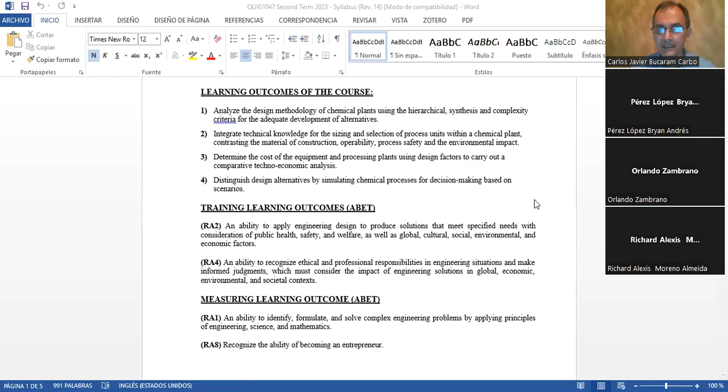Eso es, jóvenes. Entonces vamos a revisar lo que tenemos hoy que cumplir. Veamos dónde se encuentra nuestro sílabo; si no lo encontramos aquí, lo podemos buscar. Diseño de plantas, tenemos nuestro sílabo número 14, la revisión 14. Muy bien, aquí lo tenemos. Vamos a proceder con el sílabo. Este es nuestro sílabo y podemos ver hasta dónde se ha avanzado. Se puede decir que nos hemos pasado un día con el tema de intercambiadores de calor, porque no tuvimos un día de clases. Es decir, hoy nos toca terminar intercambiadores de calor e inmediatamente movernos a unidades de separación. Entonces queremos aprovechar el tiempo en eso.

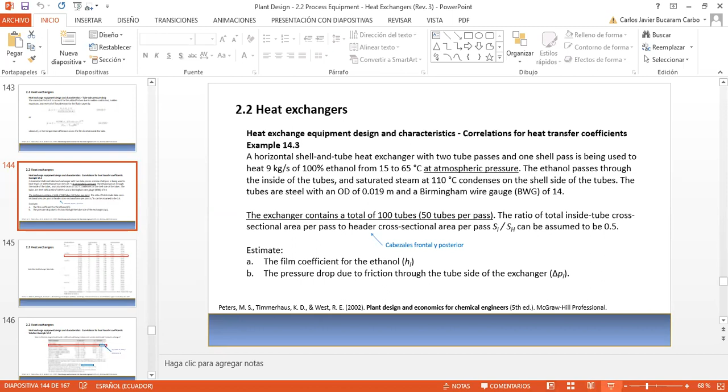Vamos al tema de intercambiadores. Perdón, compartir lo que se encuentra aquí, intercambiadores. Muy bien, espero que todos puedan observar esto. Nos quedamos en el ejercicio 3, example 14.3. This is from Peters, Timmerhaus and West, Plant Design and Economics for Chemical Engineers. It's a good book. It seems this is the last edition of Mr. Peters; I don't know if they are alive or not. But at the time when I was a student, this is the book we used, and still we consider it a good book.

Okay, so this is the example. This is what it says. Let's move this around. It says: a horizontal shell and tube heat exchanger. Sometimes I will mention heat exchanger as just 'exchanger,' but that's what I mean - a heat exchanger or an exchanger, we mean the same equipment, it's just short for heat exchanger. So a horizontal shell and tube heat exchanger with 2 tube passes and 1 shell pass is being used to heat 9 kilograms per second of 100% ethanol.

That would be flow from 15 to 65 Celsius at atmospheric pressure. The ethanol passes through the inside of the tubes, and saturated steam at 110 Celsius condenses on the shell side of the tubes. The tubes are steel with outside diameter of 0.019 meters and a Birmingham wire gauge, that's BWG, of 14. The exchanger contains a total of 100 tubes, 50 tubes per pass. The ratio of total inside tube cross-sectional area per pass to header cross-sectional area per pass, that is, the ratio of the area inside the tubes to the area of the header, can be assumed to be 0.5.

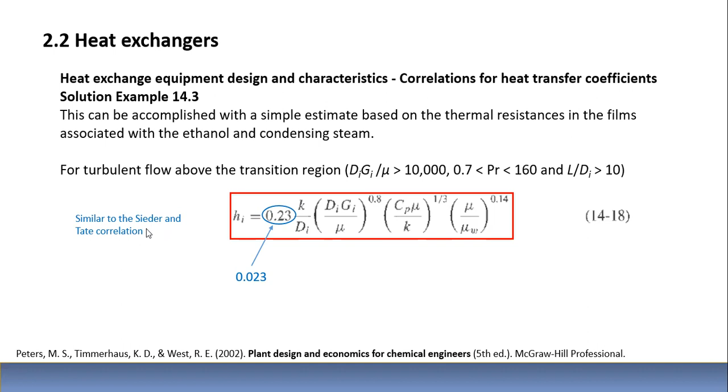This is very similar to the Sieder-Tate correlation that we have seen in last class. I think we saw that.

Okay, so the property data. Please be aware that if ethanol came in at 15 and left at 65, when we look for the properties, we have to look for the average temperature of the bulk of the fluid. That is, if the fluid came in at 15 and left at 65, we have to make an average between the entering temperature and the exit temperature, so as to avoid having an error if we're too close.

That is, the temperature of the bulk of the fluid is around the average between the incoming and exit temperatures. If we take the incoming temperature and search for the different values of the parameters at that temperature, when we do our calculation for the film coefficient, we might actually have a considerable error.

So it is wise and recommended, and that's what the book practices, to actually make an average for the film coefficient calculation. In this case, since the ethanol came in at 15 and left at 65, the correct temperature to search for the values of the different parameters—viscosity, thermal conductivity, heat capacity, density, and thermal conductivity at the wall for steel—will be the average temperature of the fluid, as you see there. So all the parameters at the average temperature of the fluid inside the tube.

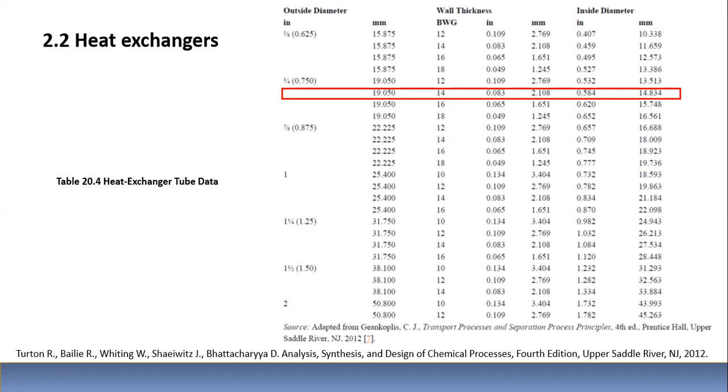So it says here, according to this calculator, 0.0001728, or 0.000173 square meters. We come back here, it says 0.000177, but I have 173 or something like that, square meters.

So the inside surface area of the tube would be 0.047 square meters per meter of tube length. That is pi times the diameter, times the length of the tube.

So what does this mean? It means that what you consider for heat exchange is a wetted surface, the area that is wet. Inside the tube, of course, the whole tube is wet, but for heat exchange purposes, what matters is the surface where the heat exchanges energy from one side to the other, usually from the hot side to the cold side. That takes place through a specific surface area, which we call wet area.

Different books call it the wet area. Wet area is pi times d, that is the circumference of the pipe, times the length of the tube, that is the wet area. That's why you see pi times d, and then we multiply by the tube length, and that will be in square meters, because pi times d is just linear meters, times the tube length gives us square meters. Hopefully this is understandable. That's the inside surface area, I should put square meters here.

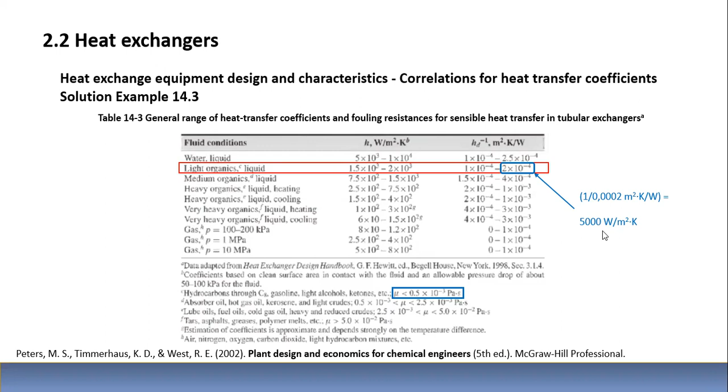So when the units here are square meters Kelvin divided by watt, they are inverted, inverted to the film coefficient units. When we invert this, it comes out to be 5,000 watt per square meter Kelvin. That number is going to be used as a fouling coefficient for ethanol.

A no-fouling coefficient will be used for steam. Now, this equation can be used to calculate the overall internal heat transfer coefficient - it will be the right equation to consider. It says in here, from table 14.4, the steam film coefficient can be estimated conservatively as 1 times 10 to the fourth. Let's check this really quick.

We can come in here, table 14.4, steam condensation at 100 kilopascals - this will be the film coefficient in watt per square meter Kelvin. Sure enough, you see it's between 1 times 10 to the 4 and 1.5 times 10 to the 4, that is between 10,000 and 15,000. So conservatively it could be any of these values, between 10,000, 11, 12, 13, 14, up to 15,000 watt per square meter Kelvin, the film coefficient for steam.

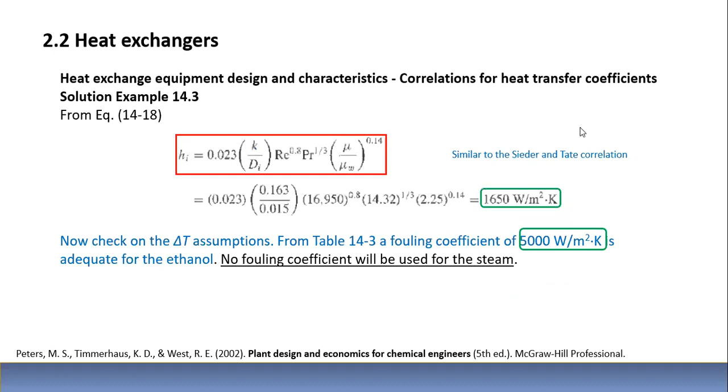So to be conservative, these books stuck with, I believe, 10,000. Yeah, just consider 10,000. The overall heat transfer coefficient can be estimated from equation 14.4a, which is this equation.

But in practical terms, it will be this equation, which is 1 divided by the overall internal heat transfer coefficient, with an I in there, equal to 1 over the film coefficient of the inside of the tube, HI, plus 1 over the fouling coefficient inside of the tubes, which is 5,000, plus this ratio, which takes into account the conduction.

This is a conduction term through the tube wall. That's why you have the natural log of the ratio of the outside diameter of the tube to the inside diameter of the tube, divided by 2 times the thermal conductivity at the wall, which is usually steel or stainless steel, plus the ratio of the internal to external diameter of the tube, divided by the film coefficient on the outside of the tubes - in this case, steam.

What is missing here, like you see, not available, NA, is the fouling coefficient for steam. So the fouling coefficient for steam was not considered - this term was just not considered, was ignored. That's why this term represents this, this term represents this.

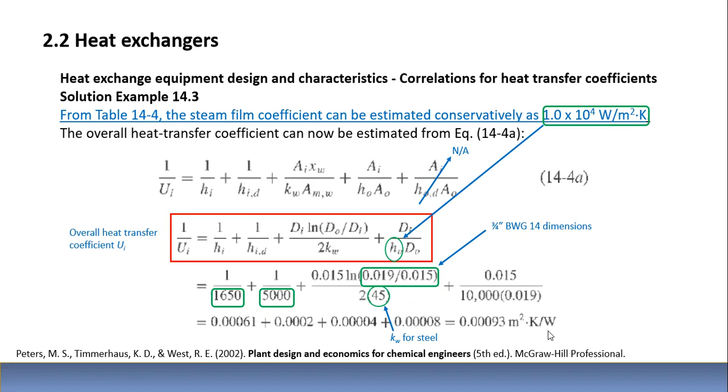Once we have the total of 1 over U in square meter Kelvin per watt, we invert this to get watt per square meter Kelvin, and obtain the overall heat transfer coefficient between ethanol and steam. Also, to determine the delta T logarithmic mean, there is a formula for that, which you might be aware of from fundamentals of heat transfer.

That will be 110, the temperature of steam, minus the incoming temperature of ethanol, minus 110, the same temperature as steam, since steam condenses at the same temperature and does not change, minus 65, the exit temperature of ethanol. Over the logarithmic mean of these two differences, it comes out to be 66.9. That is the delta T logarithmic mean.

From equation 14.6, which you might remember, Q is equal to M CP delta T, but also Q is equal to UA delta T. When Q equals MCP delta T, and we have all these values, we know CP, we know delta T, this is from the ethanol side, the cold side. Why is it cold? Because it was heated from 15 to 65, so it came in cold.

It came in at 15, so it was a cold fluid, while steam was a hot fluid because it already came at 110 and condensed. It gave up heat, but condensed at the same temperature. So ethanol is the cold fluid, that's what you see in MCP delta T, this is a calculation done for the cold fluid. 9 kilograms per second is the mass flow rate of the cold fluid, CP is the heat capacity of the cold fluid, and delta T is the delta T of the cold fluid.

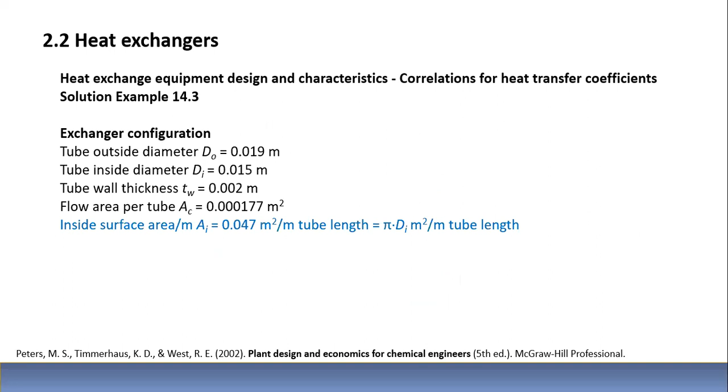Replacing both values and the Q from the previous calculation for the cold fluid came out to be 16.3 square meters. Now what would be the length of the tubes, if we have already been given the amount of tubes? They told us 50 tubes per pass, remember from the problem statement. The problem statement mentioned the heat exchanger will contain a total of 100 tubes, 50 tubes per pass.

They also mentioned that the ratio of the total inside cross-sectional area per pass to header cross-sectional area per pass can be assumed to be 0.5. That is, the header has twice the area of all the area inside of the tubes. That's pretty much what we're seeing here. Very good. So there are 100 tubes, 50 tubes per pass.

To determine the area, and from the area determine the length of the tube, knowing the amount of tubes, we take the area divided by the total number of tubes, divided by this number, which came from the wetted area, pi times Di, the internal diameter of the tube. What tube is this? It's a 3/4 inch BWG 14 tube. It has an inside diameter of 0.015 meters, or 14.8 millimeters, as we saw in the table from the book of Turton.

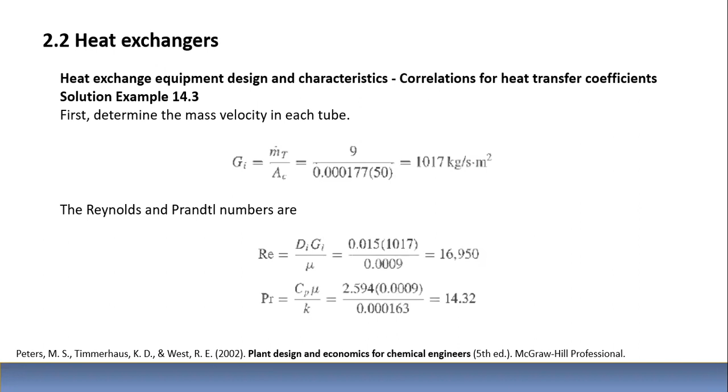So 16,950 is way over 2,100, so this is a turbulent region. That's why we have to use the Fanning friction factor for this case when the Reynolds number is above 2,100. So this is a correct correlation.

So to evaluate beta sub I, we have 1 plus 0.51 times K, where K sub 1 is equal to 1 minus the ratio of the total area inside of the tubes to the total area of the headers, squared, plus K sub C, plus 0.5 times the number of passes minus 1 divided by number of passes. That is the number of passes in the exchanger. In our case we have 2 passes, so that will be 2 minus 1 is 1, divided by 2.

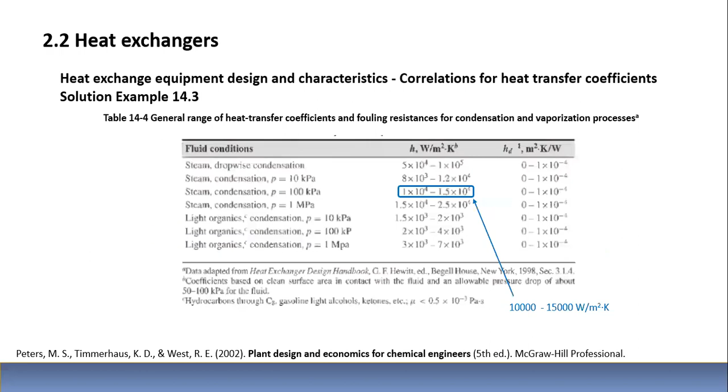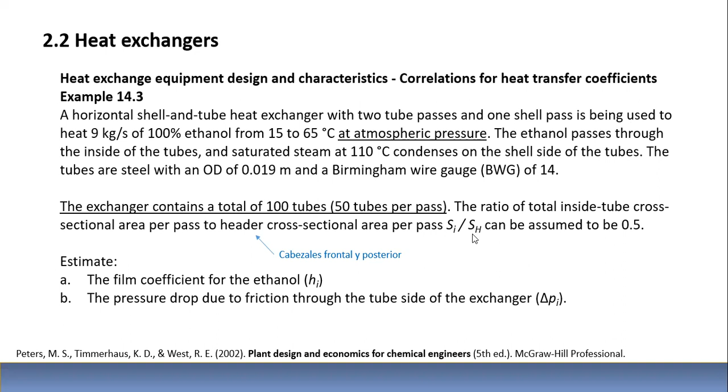So we have a constriction from the big area to the small area. When that constriction is less than 0.715, which is our case, because the problem states the ratio of the total inside tube cross-sectional area per pass to the header cross-sectional area per pass, SI to SH, can be assumed to be 0.5.

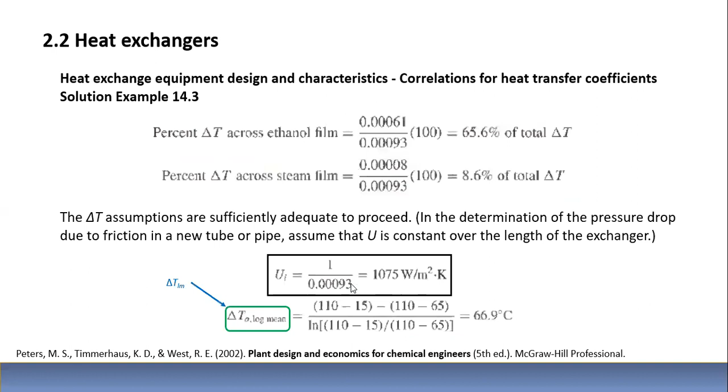Now the ratio of viscosities to the power of 0.28. This ratio of viscosities was previously calculated. Where is that? It was in here. We explained this already, 0.0009 divided by 0.0004, so it's 2.25. We add 2.25 right there to the power of 0.28.

What is also included in this equation, beta I, we will see here. Fi has been included. Where is Fi? And we see right there, this Fi, the final friction factor, was included in this equation. And it's a bit strange because the final friction factor is not here. I don't see the final friction factor there. And I don't see the final friction factor there.

But the final friction factor is right there. So beta can be calculated with the previous values that we have. And then to calculate delta PI, then we need to calculate the final friction factor. And it was already included in here.

So what does this value represent? This value represented the friction factor. What is the friction factor? There, 0.0066. That will be the friction factor of one tube times 100 tubes, because there are 100 tubes in total.

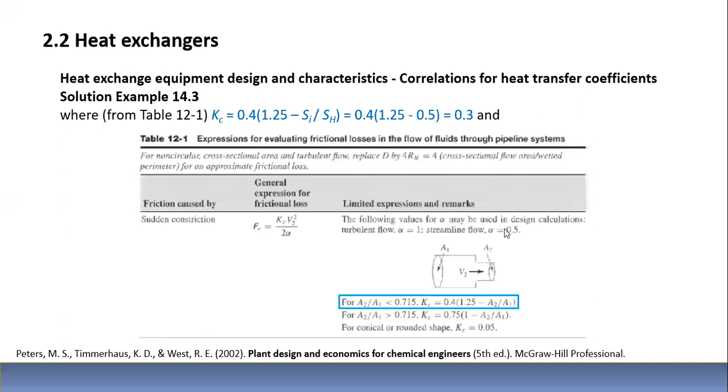That would mean 0.656, which is the number that you see there. And that is divided by the difference in temperature in and out times the Prandtl number to the 2/3. Prandtl number was calculated 14.32 to the 2/3, and the difference in the temperatures of incoming and exit temperature of the fluid. So this came out to be 1.16.

And you also see that the final friction factor, 0.0066, has been taken as it is for one tube, like you see right there. Final friction factor for one tube, while beta included the final friction factor for all of the tubes. For some reason, they did that. Although I have to recognize it is not in the original formula. It's not in the original.

So in a case, we have to calculate this. My recommendation: you guys don't have to worry about the final friction factor in this equation, beta sub I, because it's just not in the formula. But for delta PI, you do have to include it and consider the final friction factor for one tube, as you see right there.

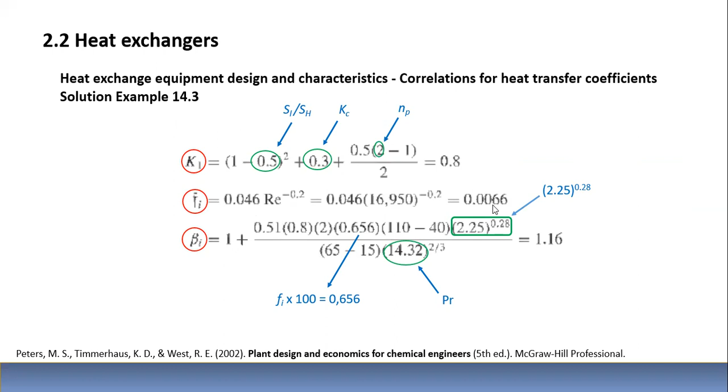Applying equation 20.77 and 19.16, que son estas dos, to the previous pressure drop calculation using Excel, we obtain Fanning friction factor 0.0063. Comparemos esto con... ahí estuvo. Mire usted, interesante que el factor de fricción de Fanning con esta correlación sencilla nos dio un valor bastante cercano al calculado con esta otra ecuación, que se ve un poco más compleja, ¿no?

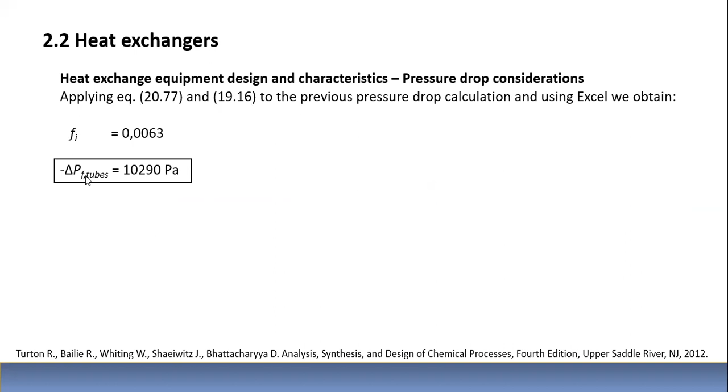Sin embargo, la caída de presión aquí dio aproximadamente 10,290 versus los 8,169.

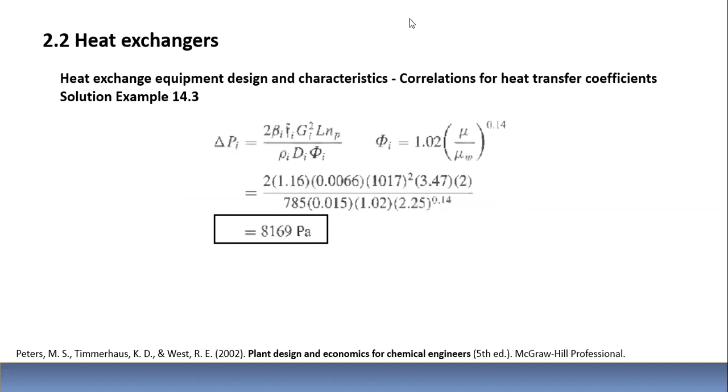Para terminar, revisemos por favor la hoja de Excel que contiene estos cálculos, y ya me despido de ustedes si lo dejo bien. Vamos a ver si está aquí.

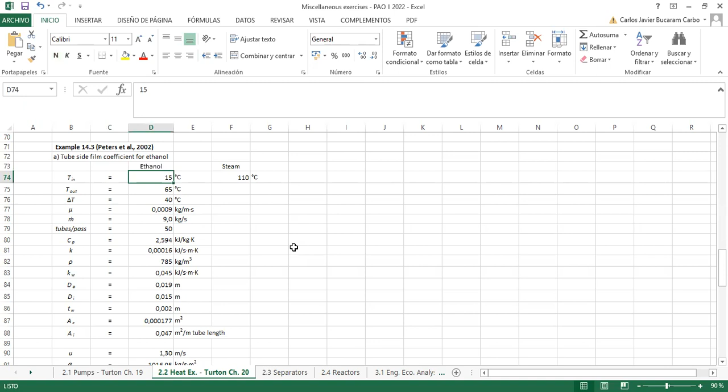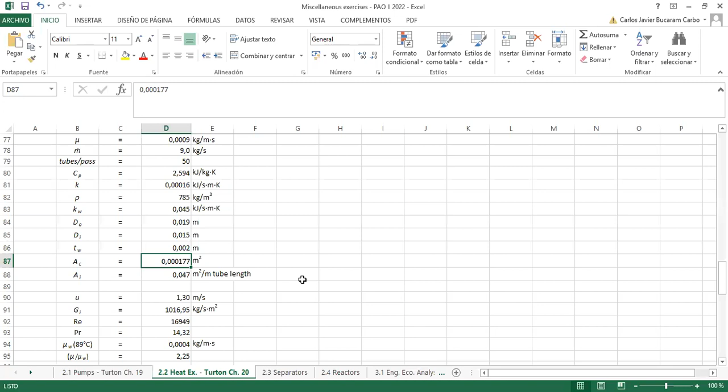Acá está. Ecuación, ejemplo 14.3. Usted puede ver del lado del vapor, espero que todos, vamos a ver si lo agrandamos un poquito, todos pueden ver esto. Del lado del vapor, del lado del etanol, que dijimos entró a 15, salió a 65, el delta T general. Estos parámetros para ese valor promedio, el espesor de la pared, esas son dimensiones de la tubería 14 BWG, 3/4 de pulgada, el área de sección transversal, el área es el perímetro húmedo, ¿no?

Metro cuadrado por metro de longitud de la tubería, la velocidad, el factor GI, que es el flujo másico dividido para el área de la sección transversal, el número de Reynolds, el número de Prandtl, esos son valores calculados, usted los podrá ver ahí. Número de Reynolds, el número de Prandtl, este valor estimado 89, como lo vimos en el ejemplo. La relación de la viscosidad del promedio del fluido a la viscosidad en la pared.

El coeficiente interior de transferencia de calor fue determinado a través de la ecuación de la correlación de Sieder-Tate, y eso es lo que usted ve aquí.

Todos estos cálculos usted puede ver: D92 a la 0.8, que es el número de Reynolds a la 0.8; D93 a 1/3 es el número de Prandtl a 1/3; D95 al 0.14 es la relación de viscosidades a la 0.14.

D81 por 1000, de donde viene D81, esto es la conductividad térmica, seguramente puesta en joules sobre metro, Kelvin y segundo, para que las unidades finalmente se cancelen.

Se obtiene 1644, este valor de la tabla 14.3 si recuerdo bien. Este valor de la tabla 14.4 es el coeficiente de película externo para el vapor, que vimos de 10.000; el fouling factor, el factor de deposición para el vapor, lo ignoramos. Como recordará usted, 1 sobre el coeficiente global de transferencia de calor toma en cuenta estos factores, y usted ve que se tomó en cuenta también el segundo término que considera la conducción de calor.

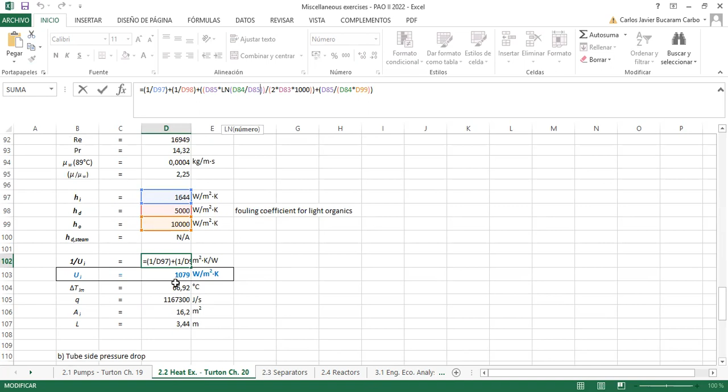La resistencia a la conducción y el delta T medio logarítmico también fueron calculados.

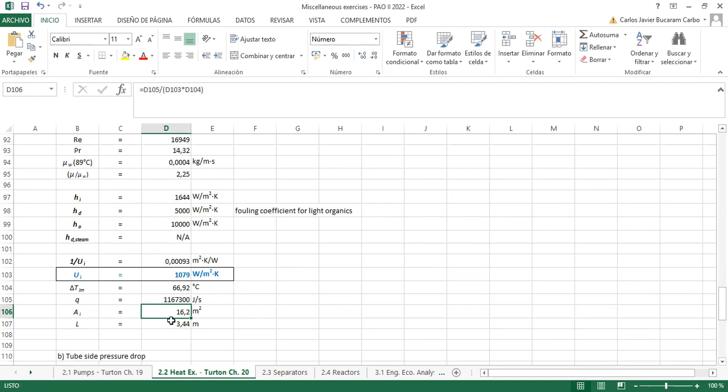Esto pues son, digamos... el Q, que es la carga total de intercambio de calor, era 1.167, esto en megajoules por segundo, es decir megawatts térmicos. El área salió en 16.2. La longitud en 3.44; creo que al autor le dio 3.70 y pico, pero a mí me dio 3.44.

Mire usted la caída de presión, usando la ecuación K sub i, f sub i, que es 0.046 número de Reynolds a la menos 0.2 —mire aquí está el menos, hay que tomar en cuenta eso— efectivamente dio 0.00656. Beta, que se encuentra aquí, 1.16, algo similar a lo que dio el autor.

El delta P, 8000, con la fórmula 14.3 si recuerdo bien, de Peters. Ahora, usando el método de Kern recomendado por Turton, tuvimos esa constante de rugosidad para tubos de acero comercial.

Es un valor conocido, por eso es una constante, por eso ve aquí no hay cálculos. El primer término del cálculo del factor de fricción, porque el factor de fricción de acuerdo a la ecuación de Pavlov tiene dos términos: el primer término es este, el segundo término es este, y finalmente el factor de fricción de Pavlov, para un flujo en régimen completamente turbulento.

Y el delta P de la ecuación, creo que era 20.77, nos arrojó 10.000. Es decir, aquí tenemos un diferencial con estos otros números. En algún momento estuve haciendo cálculos de otro ejercicio, donde parecía otro número; a veces uso la misma hoja de Excel y me pongo a hacer cálculos de otros ejercicios. Entonces ve usted un diferencial importante entre estos dos, pero ya creo que sé por qué.

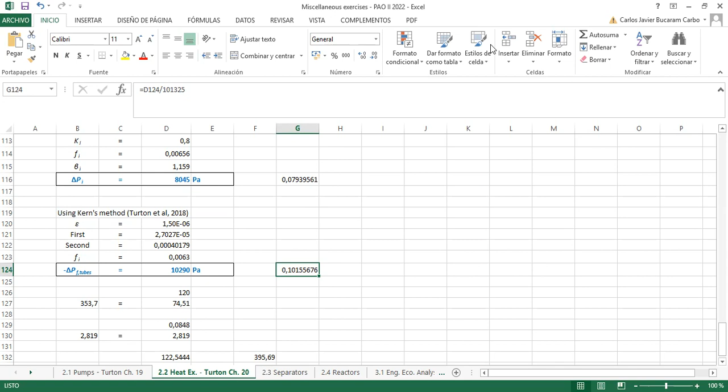Está dividido para 101.325, que es una atmósfera de presión, representando una caída de presión de 0.08 atmósferas aproximadamente. Y este otro, dividido para los mismos 101.325, representa una caída de presión de 0.1 atmósferas. Es decir, entre 0.08 y 0.1 atmósferas la diferencia parece importante, pero realmente es pequeña; en teoría pudiéramos usar cualquiera de ambas relaciones y obtener un valor bastante sensato.